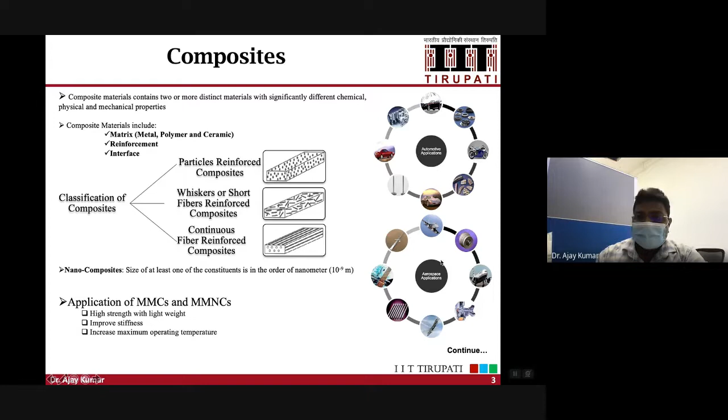So I will focus more on particle reinforced composites. Why do we choose these composite materials? Because they have high strength with lightweight, improved stiffness, and they can also be used in high temperature conditions. You can see there are various applications of these composite materials, and we will be discussing these applications after this technical presentation.

Let me take you towards the market of these composite materials. Why there is so much interest in these materials? Because metal matrix composites have a good market in most countries. If you take the example of India, it has a very rich history of developing composite materials. It started a long time back in the 1970s, 1980s.

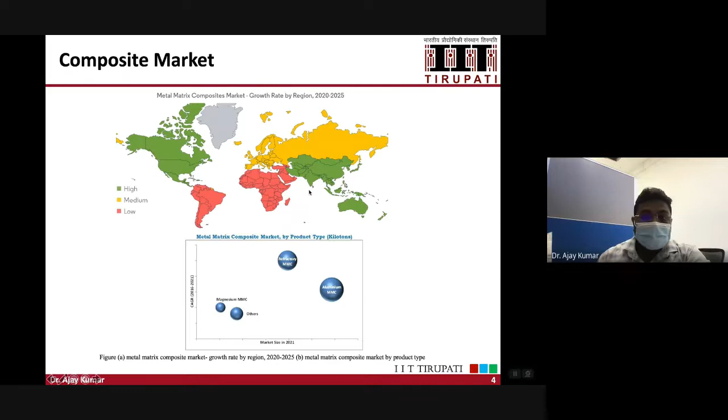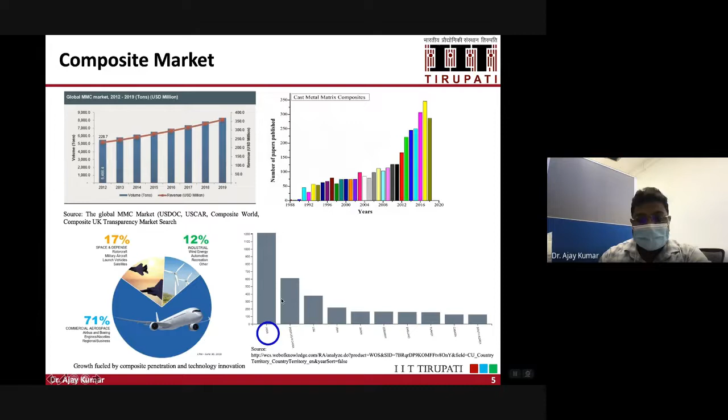Today also a lot of work is going on in this area, and now new types of next generation composite materials are being developed. If you see the number of publications in this area, you will be surprised to see that India is publishing more papers compared to other countries.

Now you will be aware about different processing methods for making these composite materials - vapor deposition, liquid state processing, solid state processing. Each process has its own pros and cons. So in today's talk, I will be focusing on a new method, friction stir processing, to make nanocomposite materials.

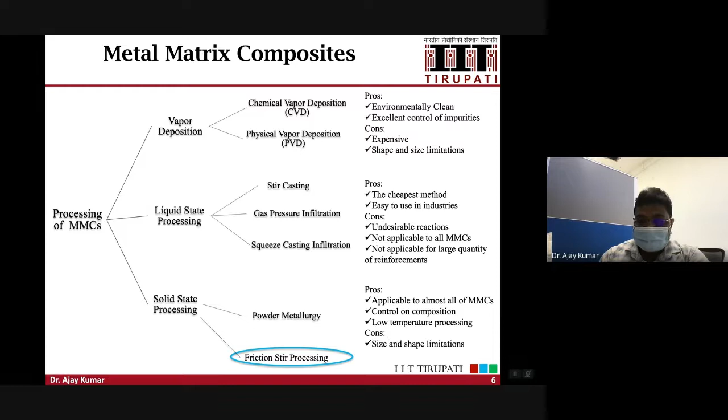When you talk about composite materials, you should also know about the strengthening mechanisms which operate in metal matrix nanocomposites. There are four types of strengthening mechanisms that operate in metal matrix nanocomposites. First is grain refinement strengthening.

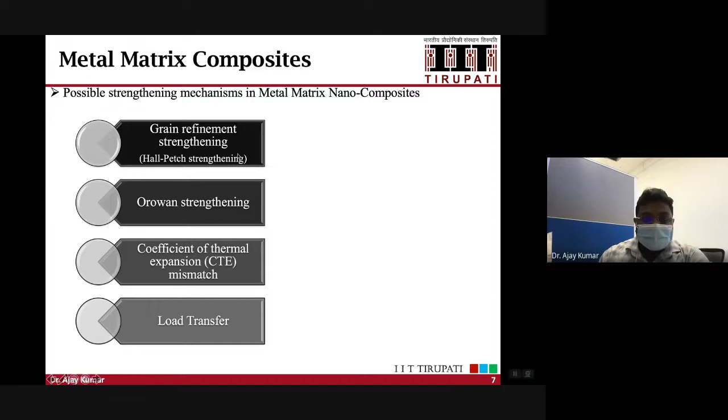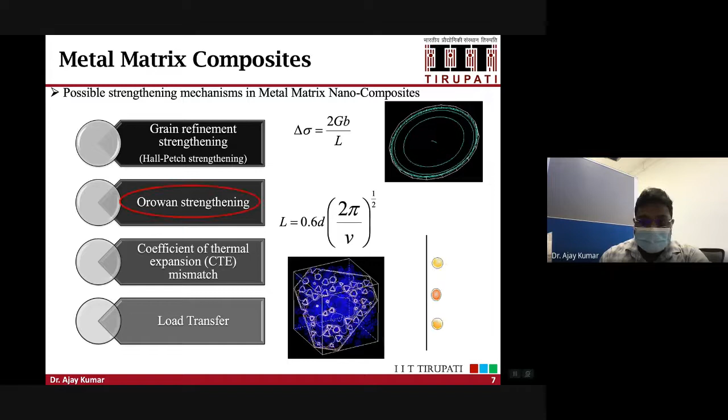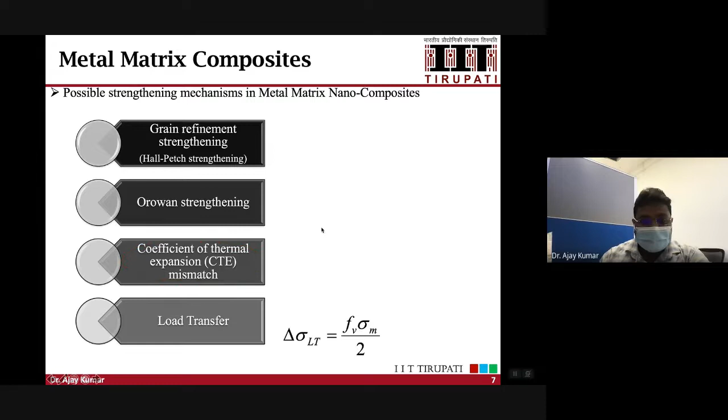There we talk about Hall-Petch strengthening, then Orowan strengthening, where you have dislocation loops and dislocation interactions. Then another mechanism is the coefficient of thermal expansion mismatch between the matrix and reinforcement. And then you have load transfer. So these mechanisms are operating in metal matrix nanocomposites.

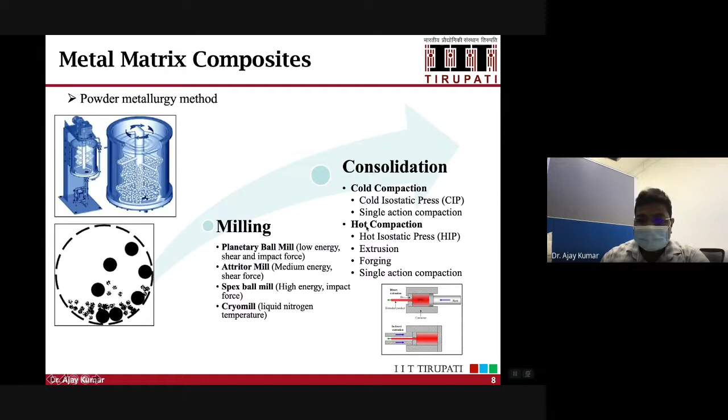When you talk about the powder metallurgy method of making composite materials, you will be aware of the milling process and then consolidation of the milled particles. This comes under the powder metallurgy process, where you have different types of ball milling, and then you reduce the particle size of the material, and then you do compaction - either cold compaction or hot compaction, depending on the requirement.

Now, when we talk about composite materials, we are aware that metal matrix nanocomposites have high strength to weight ratio, high thermal stability, low coefficient of thermal expansion, and high wear resistance. Because of these features, we are interested to develop these materials.

We are also aware that the size, shape, content, and distribution of the dispersoid, matrix interface bonding, and the microstructure properties are the controlling parameters for the performance of these materials. So when you see the stress strain plot for these materials, you will always see those materials have high strength.

So take the example of this stress strain curve, where you have aluminum 4.1% AlN, and then aluminum 16.4% AlN. What you see from this stress strain diagram is high strength compared to the base material, but the toughness of this composite material is not great. It is reducing compared to the aluminum, or it has less deformation compared to the base material. That's why these composite materials have limited use in automotive or aerospace industries.

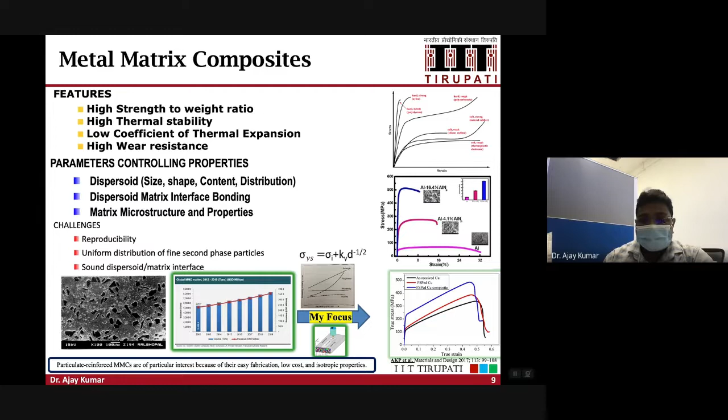That is why we are using an innovative idea of utilizing the friction stir processing method to make new composite materials. As you know, we have mechanical alloying and solidification processing as conventional methods for making composite materials. At the same time, we have limitations.

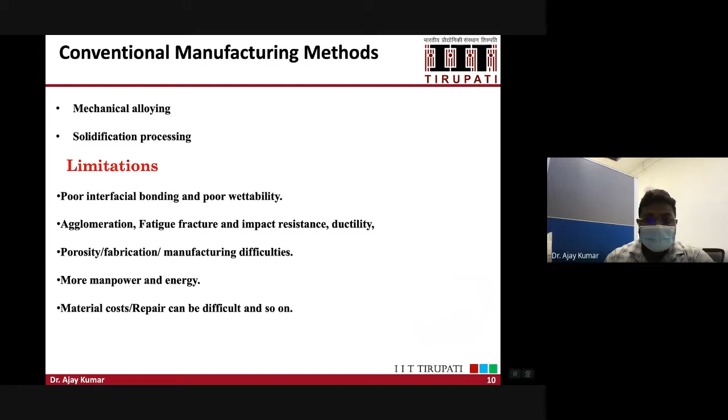We have poor interfacial bonding and poor wettability between the matrix and reinforcements. We have problems of agglomeration, fatigue fracture, impact resistance, porosity, and we use more manpower and energy to produce these composite materials using conventional methods. At the same time, we also face the problem of cost and repair.

So when you make composite materials using conventional methods, for example metal casting - casting is a very well-known method for making composite materials - there are scientific issues when you use casting for making MMCs. First is the transfer of reinforcement into the melt, then movement of reinforcement into the melt, effect of reinforcement on viscosity and fluidity of melts, effect of reinforcement on nucleation growth and microsegregation, and engulfment or pushing of the reinforcement particles by the solidifying interface, and then effect of distribution, bonding, volume fraction on physical and mechanical properties of MMC. These are the scientific issues.

These issues are still there, and a lot of research needs to be done. It has a lot of scope of research to address these scientific issues.

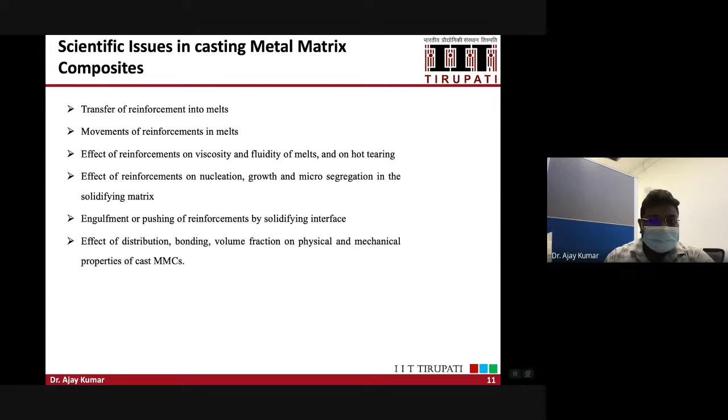Now let me introduce the friction stir processing method. You will be aware about this method very well. This method is based on friction stir welding.

This is the schematic of friction stir processing, where you have the friction stir processing tool which rotates at high RPM, and then you plunge it into the material. Then it will also traverse in a particular direction. So if it is welding, then you have the two metal plates, and along the welding direction, this tool will traverse. So you have the tool rotation, the downward force, as well as this tool moving along the processing or welding direction.

When you have this processed material, you get four types of zones. The middle one is the stir zone, which is also called the composite zone if you are using this process for making composite materials. Then you have the thermomechanical affected zone, heat affected zone, and then the base material.

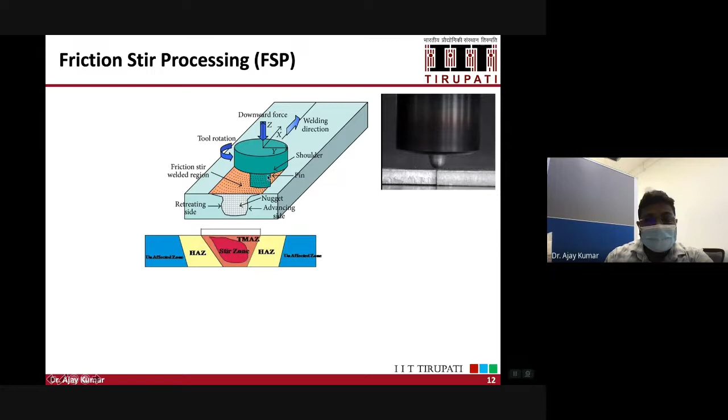So when this tool interacts with the hard ceramic particles during the process, you will have a lot of wear or material removal from the tool. It means that the tool is getting mixed into the metal matrix, and you will get undesirable properties. So you need to avoid this tool wear, and this is a great challenge. How will you avoid this?

This work was reported in 2004, where they conducted a study on aluminum-based composite materials at different RPMs and reported the tool wear.

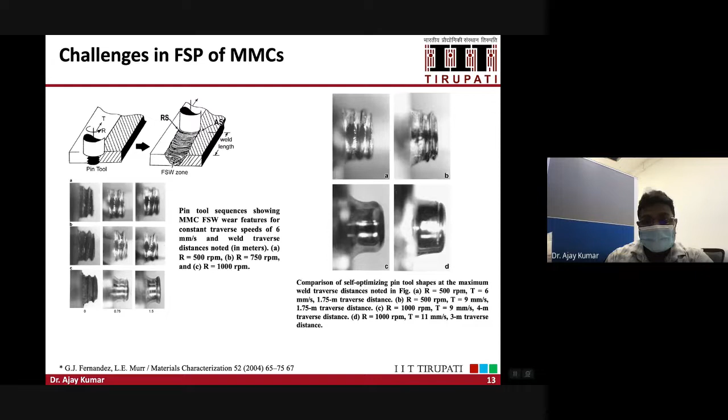To avoid this, we came up with an idea: we want to make the MMCs using this process, but we need to avoid the tool wear. The idea is to get fine nanoscale particle distribution, remove all possible defects of conventional MMCs, avoid the FSP tool wear, homogenize the microstructure, and at the same time improve the mechanical properties, high strength and high ductility.

So we innovated an approach where we mixed a cross-linked polymer into the metal matrix. If it is polymer, then during the process the temperature will rise, and this temperature is sufficient to convert the cross-linked polymer into the ceramic phase.

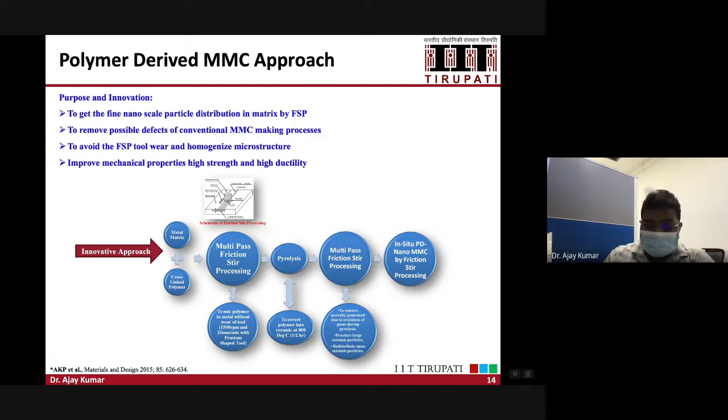If it becomes porous, it means we cannot use that material. So you have to remove the porosity, then do the multi-pass FSP process to remove the porosities and redistribute the particles at the nanoscale. This is the approach, and this idea we published and patented in 2015.

Let me tell you about PDC materials. They are a very special type of ceramic material formed by the pyrolysis of pre-ceramic polymers. There are two categories of these polymer derived ceramics: silicon carbonitride or silicon oxycarbide based PDCs. When they convert into the ceramic phase, you get silicon carbide and silicon nitride.

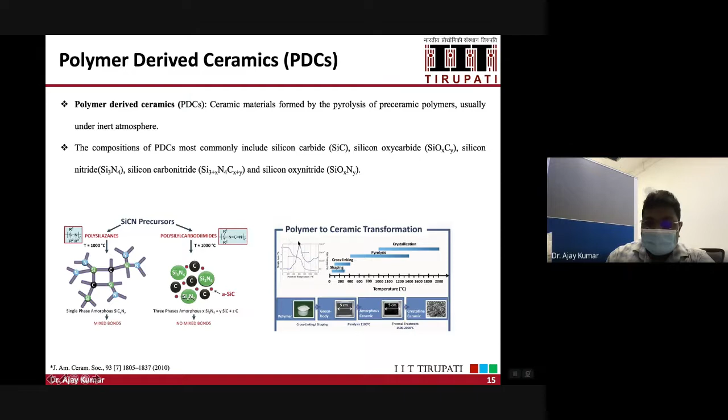A lot of work has been done on this material, it is well established. You have the polysilazanes and polysilylcarbodiimides - two categories - and you can convert these polymers into ceramic using the pyrolysis process.

There is work reported on using these PDCs in casting as well as powder form. When people tried to use PDC materials in the casting process, they found agglomeration of the particles due to van der Waals forces and porosities. And when they used the powder metallurgy process, they did not get the nano size distribution.

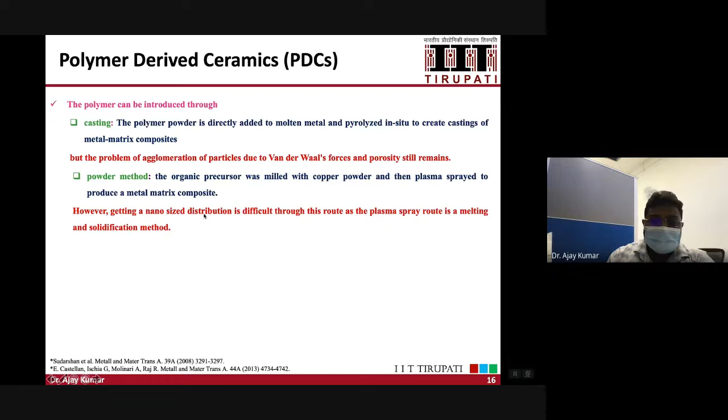That is why we used the friction stir processing method. The idea was to disperse the cross-linked polymer into the metal. This is the drawing of the sample: a 6 mm copper plate, using copper as the matrix material.

PDC is the other reinforcement. We made the groove and the holes to insert the polymer particles according to the volume percent of the PDC materials. This is the 5-axis friction stir welding machine we used for making these composite materials, and this is the design for the FSP tool.

We used a 6 mm thickness plate, and here you can see the design of the tool.

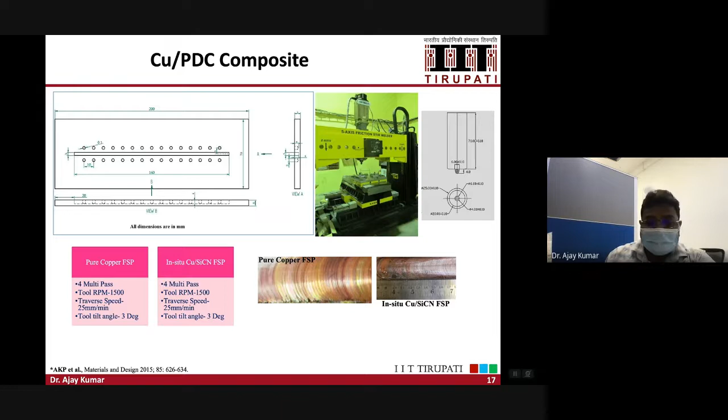We did the FSP on the matrix material copper as well as on the composite, and optimized the process parameters. We did 4 multi-pass processes at 1500 RPM and 25 mm per minute tool speed, with a tool tilt angle of 3 degrees. This tool tilt angle is very important in friction stir welding - as you must know from the previous talk, it provides a backing or forging force for support. Without it, you get a lot of cracks during the process.

Now let me take you to the microstructure. In the annealed copper microstructure, the grain size is around 400 micron. The silicon carbonitride, the polymer cross-linked powder, was around 5 micron.

In the first step, we mixed this cross-linked polymer into the copper matrix and did 4 multi-passes. From the first pass to the fourth pass, the size of the polymer particles decreases and goes down to the nanoscale.

When you take the microstructure of these composite materials, these are scanning electron microscope pictures, micrographs. You need to be very careful while taking these pictures because they are all polymer particles. You need to control the voltage or power of the system, otherwise these polymer particles can burn and you may not be able to see those particles inside the matrix. So we fixed our voltage around 5 to 10 kilovolts while taking these pictures from SEM.

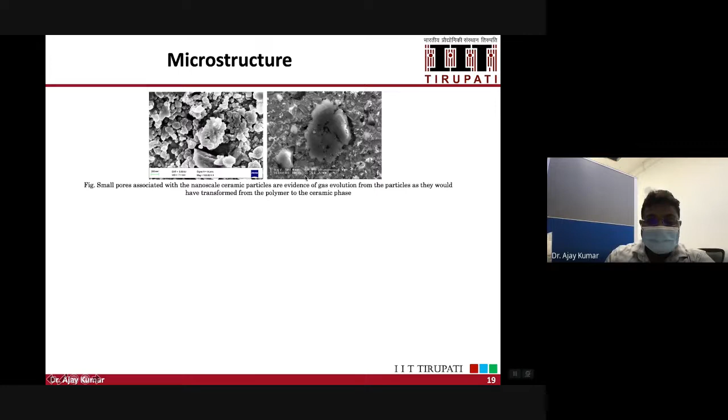As I mentioned in the previous slide, during the process the temperature will rise, and the temperature will help in the pyrolysis of the cross-linked polymer. So during the pyrolysis you will see a lot of voids, and that we can also observe from the microstructures, that a lot of voids and cracks are there in the particles.

Then we did the multi-pass processing on the same porous materials and redistributed the ceramic particles, and we again did the multi-pass process, and you can see there are no voids, but you can see the distribution of these PDC particles inside the matrix.

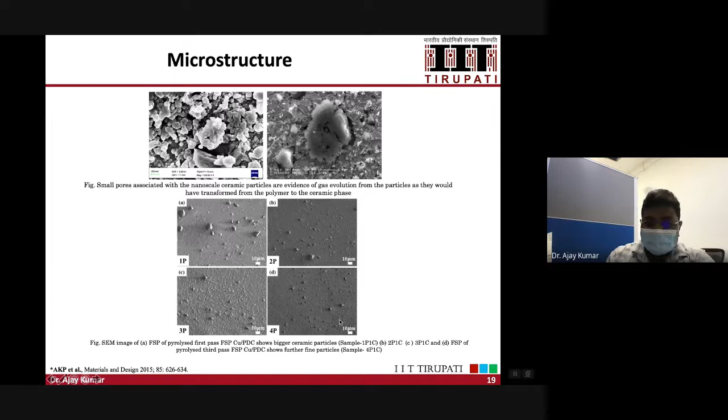To further study and understand the distribution of the PDC particles, we did the EPMA mapping and understand the distribution of the PDC particles. All the elements are present.

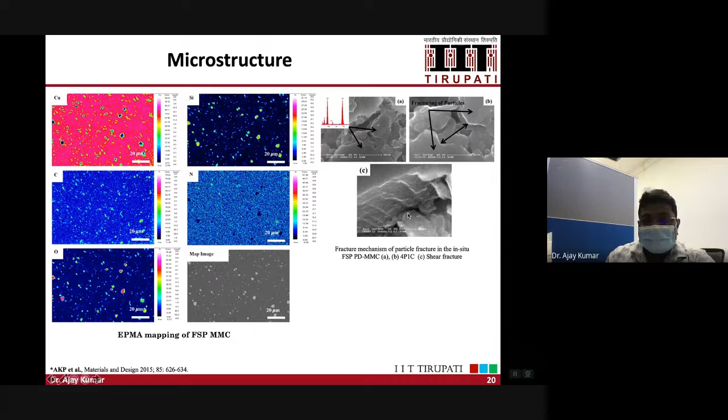Then we also understood about the fracture of these PDC particles. So we are talking about now distribution or dispersion of these PDC particles in the metal matrix. We also should know how these PDC particles are getting distributed into the matrix during the process. As you know, during the FSP process the tool rotates at high RPM, and due to the lot of shear forces generated during the process, those particles will be fractured. So you can see the shear fracture on these particle surfaces and detachment. And these particles will keep on fracturing until they reach a critical size.

We have also confirmed the transformation of the polymer phase to the ceramic phase. And the ceramic phases we have got are Si3N4 and SiC from the X-ray analysis.

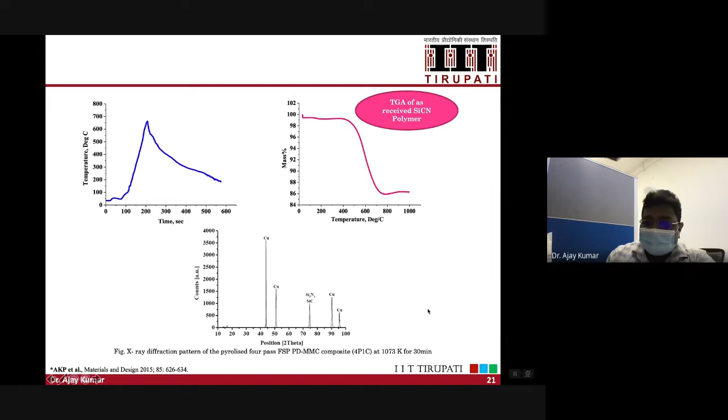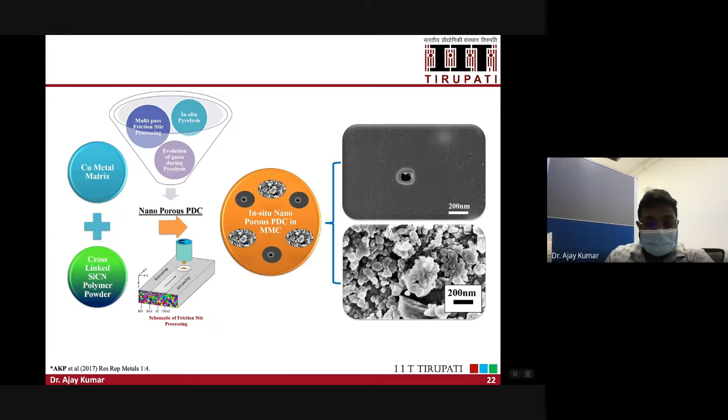As I mentioned, during the pyrolysis you get a lot of defects or voids in the matrix material or ceramic materials. So that composite material is also useful - that material will become a metal foam, and you can use it in various applications where you need to absorb a lot of energy or shock absorption. That material will help in those applications. So we can also develop the metal foam using the same approach, and you can also get the metal matrix nanocomposites. So with one approach, you are getting two types of materials for different applications, right?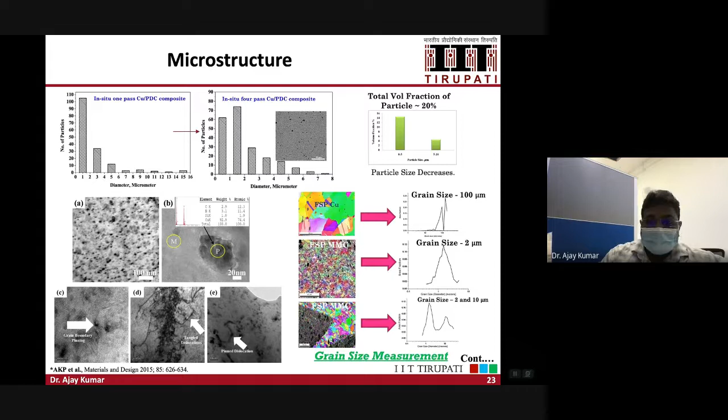And then we also should know about the strengthening mechanisms which we discussed in the previous slide. We found that the dislocations entanglement, and the dislocations are pinned by these particles, and they will contribute to the strengthening mechanism of these composite materials.

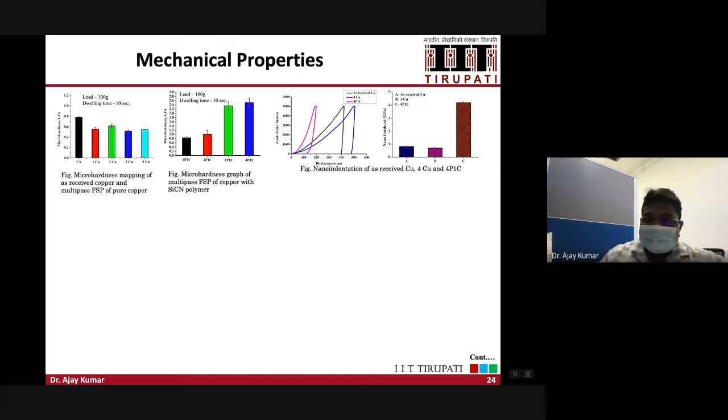Now let us discuss about the mechanical properties. So we conducted mechanical testing on these materials - a simple hardness test we did, and we have seen a significant amount of increment in the micro hardness, as well as at the nanoscale we have done the nano indentation, and we have seen the increment of the hardness. Now, an interesting point which I would like to explain here.

As I mentioned in the first slide, these composite materials have limited applications in various places like automotives or aerospace, because they have high strength but face the problem of less toughness. But here we have demonstrated, we have proved that these composite materials are high strength as well as high toughness.

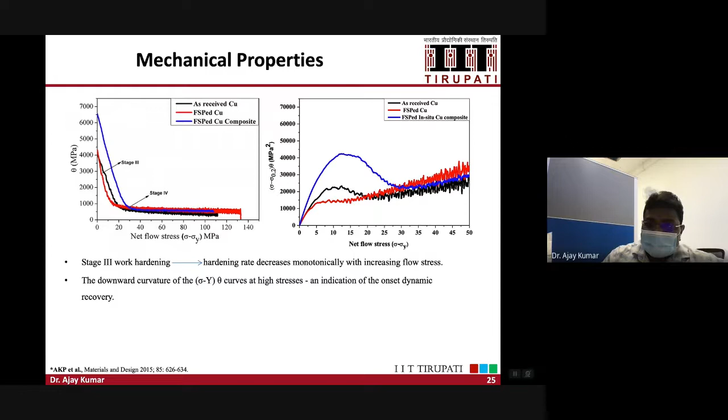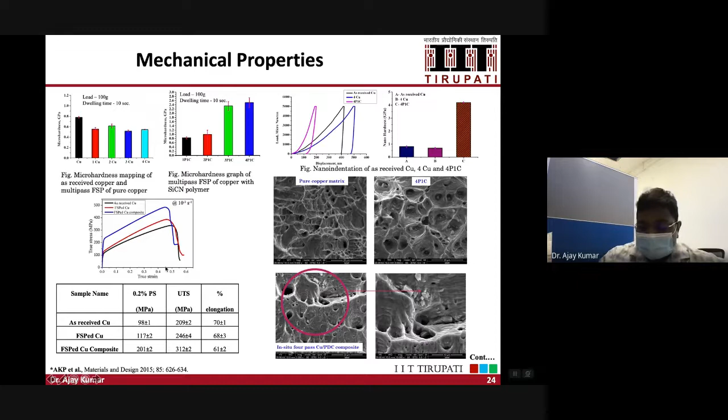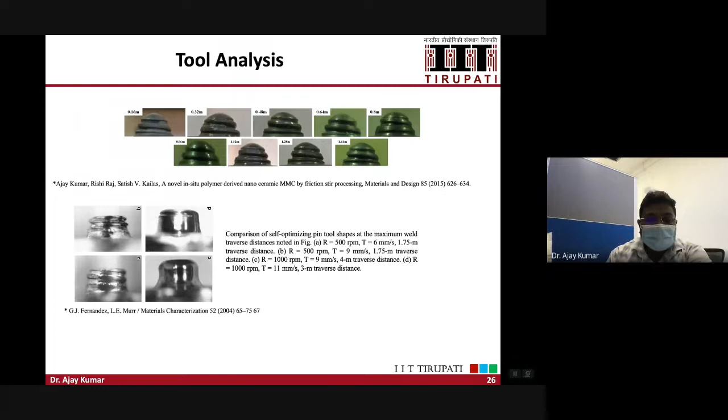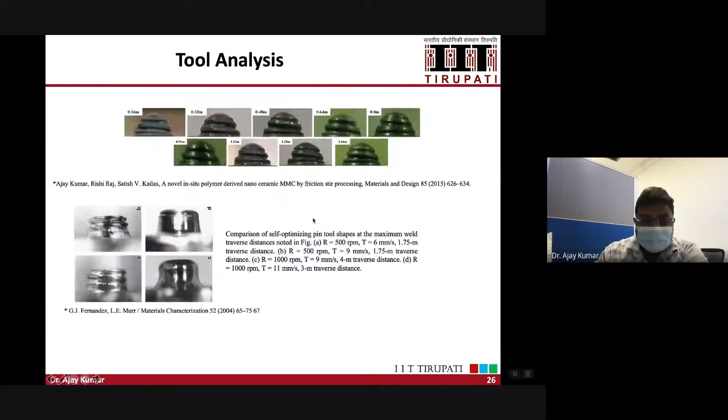Now, as I mentioned in the previous slide, when you use the FSP method for making metal matrix composites, you have tool wear. That is the main challenge in this process. But we demonstrated zero tool wear or minimum tool wear in our work. In our multi-pass process, the tool traveled almost 1.4 meters, and we have not seen any tool wear geometrically in the process. So this is the case study for the copper composites.

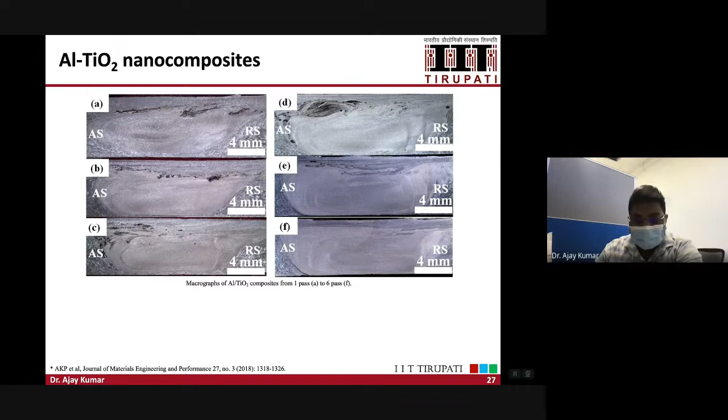Then we did a similar type of study in aluminum titania composites. Here also we have demonstrated the distribution of titania particles in the aluminum matrix and how these particles get fractured during the process. So you have the bigger particle which is porous, and by the multi-pass process these particles will be fractured and go to the nanoscale range.

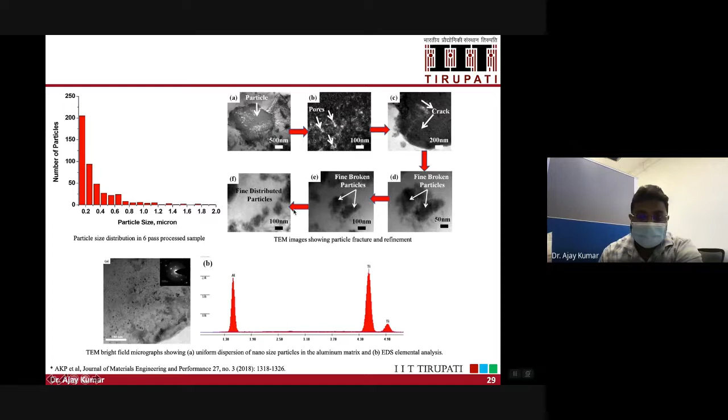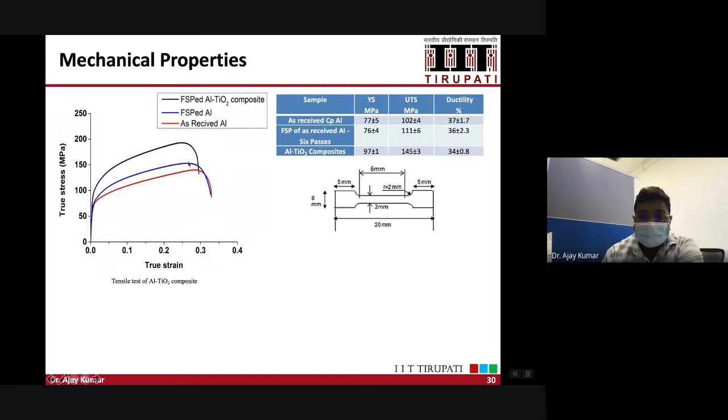So this type of mechanism we have developed to make these nanocomposite materials, and we got similar results in these composite materials, with high strength, high yield, as well as high toughness. We have also verified the experimental results with the theoretical model, and we have seen that the yield strength predicted by the Orowan equation and the experimental yield strength are almost the same.

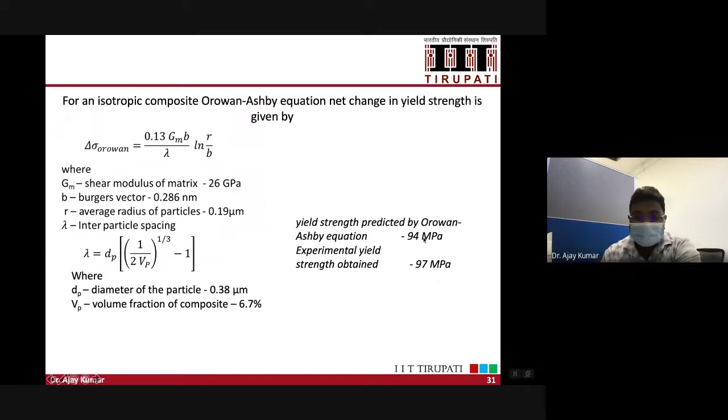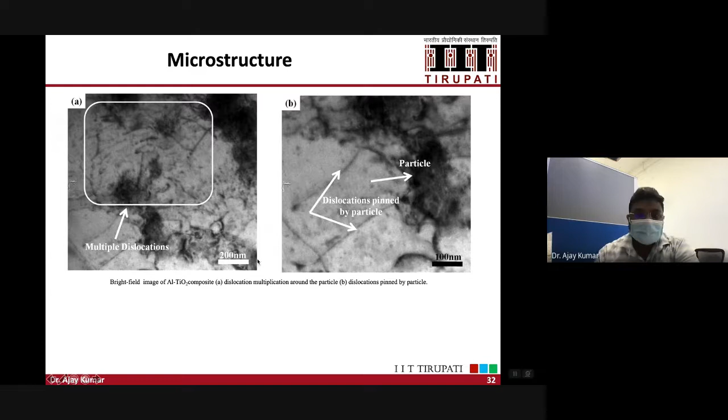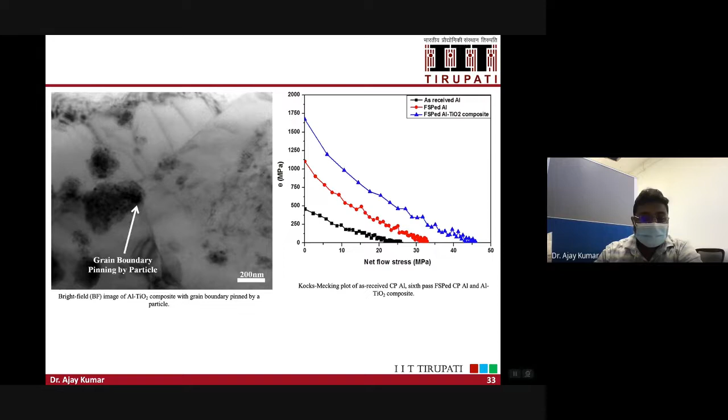Then this is an example of dislocation multiplication and dislocations pinned by the titania particles in the aluminum matrix. You can see these are the grain boundaries, and these grain boundaries are pinned by the titania particles. These are the high magnification images where you will clearly see the strengthening mechanisms operating, which we discussed in the previous slide.

The third example I would like to show you is the aluminum graphene composites. You know graphene is a very famous material with high strength and a lot of other applications. So we studied aluminum GNP, graphene nanoplatelets, composites.

Here we applied the hybrid approach of making these composite materials. We coated this GNP on the aluminum A356 alloy using the squeeze casting method, and then did the FSP to distribute this GNP in the composites.

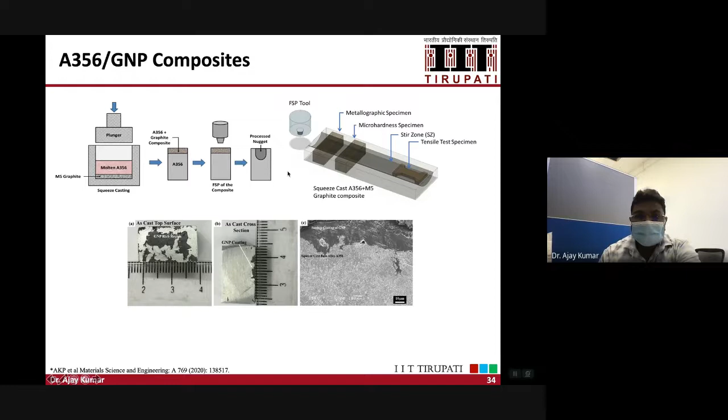Let me show you the microstructure. When we applied this process, the first step was squeeze casting, where we produced the coating of GNP on the A356 alloy, like a surface composite. Then we carried out the FSP process on the sample, and this is the nugget zone after the process, which is the composite zone here.

Then you do the microscopic study to find out whether these nanoplatelets are embedded inside the matrix. As you know, A356 is a silicon based alloy. So this is the GNP, the graphene nanoplatelets, embedded inside the matrix, and you will also see the fine silicon particles.

When we conducted the transmission electron microscopic study to understand at the nanoscale, we saw the aluminum matrix and the GNP flakes, with no defect at the interface, and the silicon particles were reduced. We also saw a significant increment in the strength as well as the toughness of these materials.

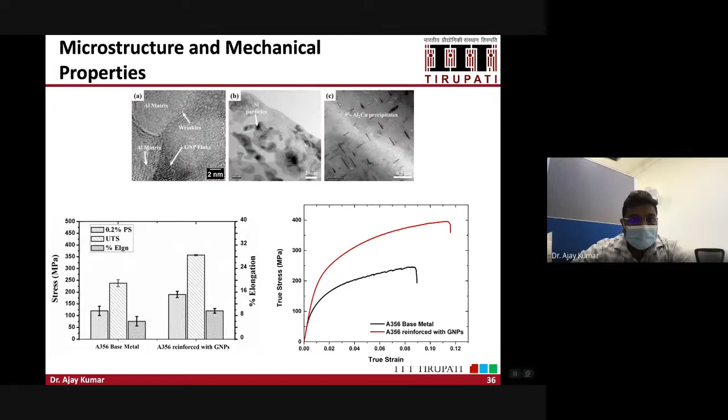So here also you can see similar results to those I showed you in the copper composites and aluminum titania composites. I have now given you three studies where we demonstrated similar results. As I mentioned in the first slide, composites face the problem of less toughness, but they can have high strength when you use conventional methods.

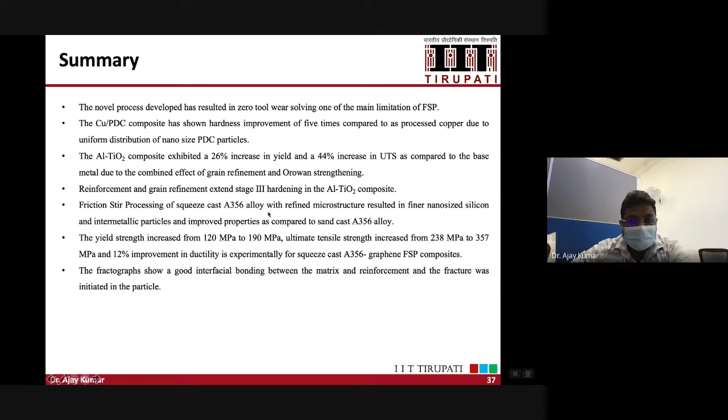But when you have the hybrid approach or advanced method of making composite materials, then you can address those issues. So to summarize this work, we have developed a process where the tool wear is zero, which is the main limitation in the FSP process. We have developed copper composites, aluminum titanium composites, and A356 GNP composites with high yield as well as high toughness.

Now let me take you towards the application part of these composite materials. From this slide you will understand the locations where composite materials are used. This is the example of discontinuous MMCs, such as the aluminum graphite antenna waveguide used on the Hubble telescope.

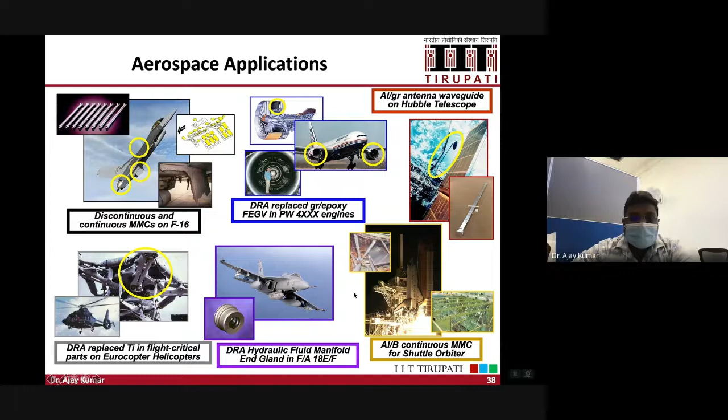There are various applications where they use lightweight, high strength composite materials in automotives. You have the MMC crankshaft pulley, this is the cylinder bore, and this is the MMC disc brake rotor.

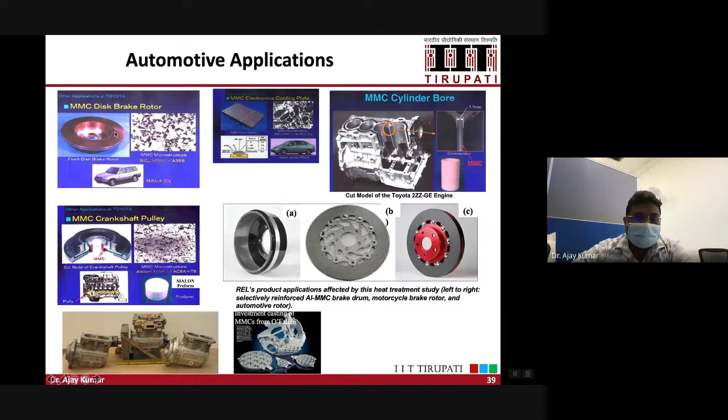Now let me give you very important information which most of you will be interested in. There are selected companies or industries that produce these composite materials. Most are US based companies. In India also we have a few companies developing these composite materials, but most of the work is still in the research stage. So there is a huge scope where you can think of developing these composite materials. You can have your own startup for different applications.

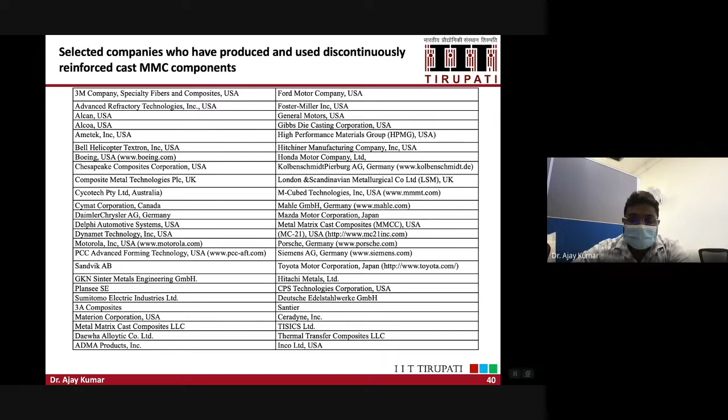Now this slide provides information about aluminum MMC components for different applications. Take the example of aluminum graphite composites, which can be produced by the gravity casting method and are used in cylinder liners. Companies like Ferrari and Hiromotors use these composite materials.

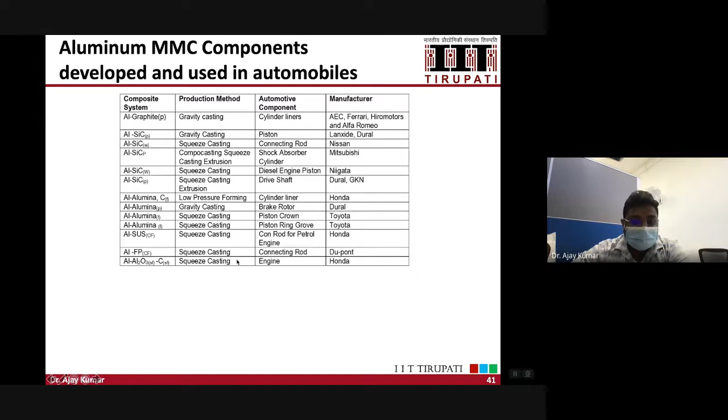Now let me show you the Make in India technologies. In India, as I mentioned, a lot of development and research work is going on. This is an example of Make in India technology: pressure die cast aluminum silicon carbide composite brake drum application, work produced at CSIR lab, Bhopal, Madhya Pradesh.

This is the example of functionally graded aluminum matrix composite materials, such as cylinder liners, gears, brake rotors, and pistons. These are all aluminum silicon carbide composites made by the stir casting method, a very good, advanced process for making composite materials. This work is from CSIR Trivandrum.

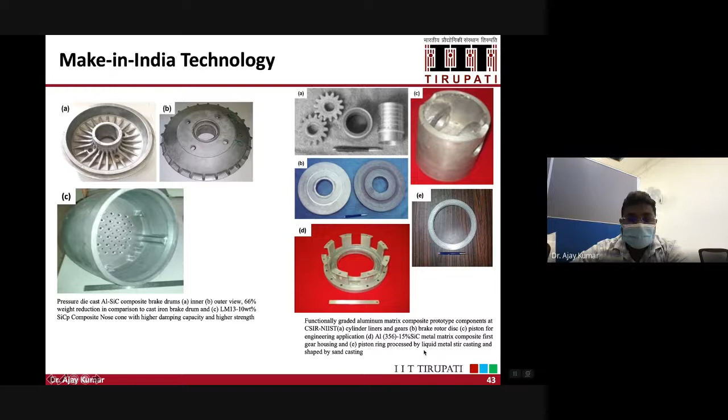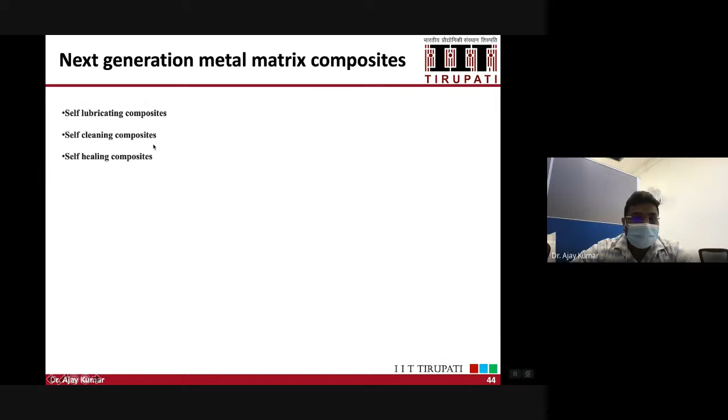Now let me give you some ideas about next generation metal matrix composites. In the next generation composite materials, you will see self-lubricating composites, self-cleaning composites, and self-healing composites. For self-cleaning and self-healing composites, there are healing mechanisms operated within the materials.

So when you have any crack inside the material, and if you are able to detect that crack during operation, you should be able to heal that crack so that the life cycle of that material increases. That is the idea, and a lot of work is now being done on this.

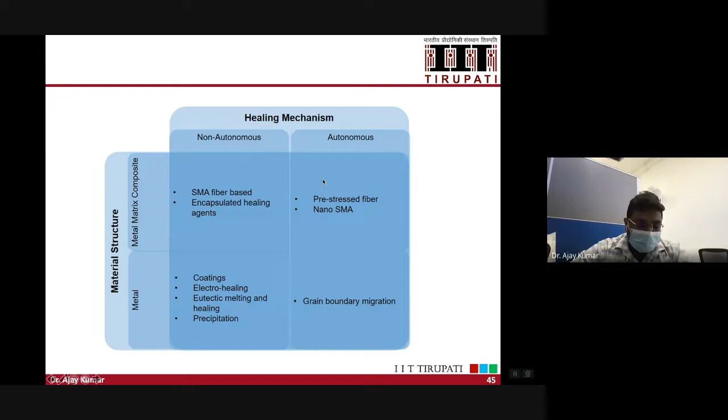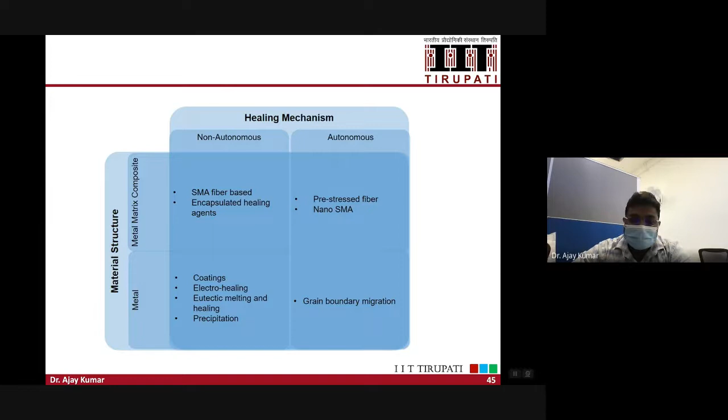At IIT Tirupati also, we are developing self-healing composite materials using different types of reinforcements. You can also use shape memory materials and encapsulated healing agents for developing self-healing materials. If you are interested, we can discuss in detail; you can contact me, as these are very important materials.

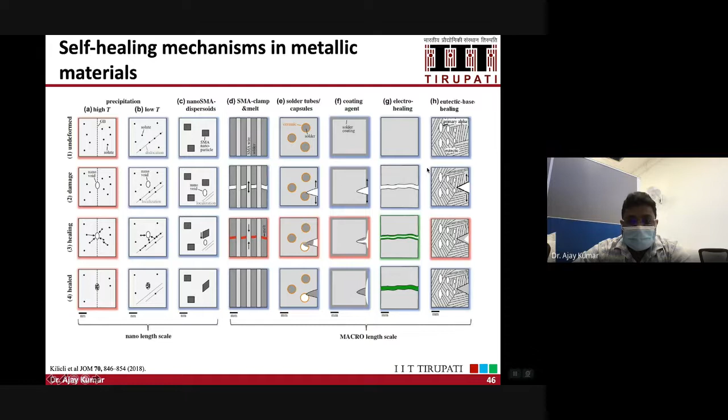There are different types of self-healing mechanisms operated in these materials. One is precipitation, which you can use for healing the crack. You can also use nano shape memory alloy dispersoids, solder tube capsules, and eutectic based healing to develop these materials. This is the future of materials in this area, and it is still in the research stage.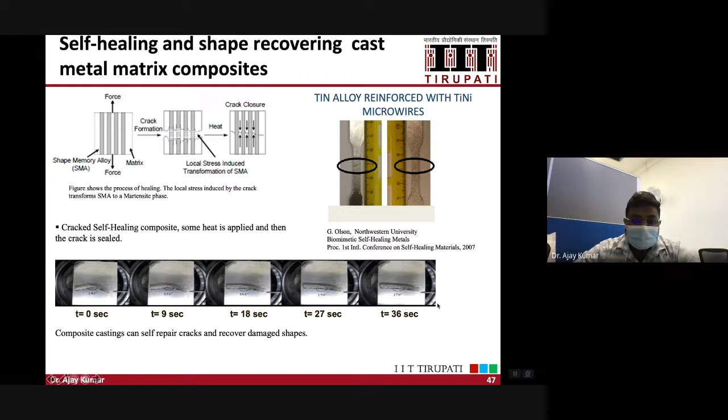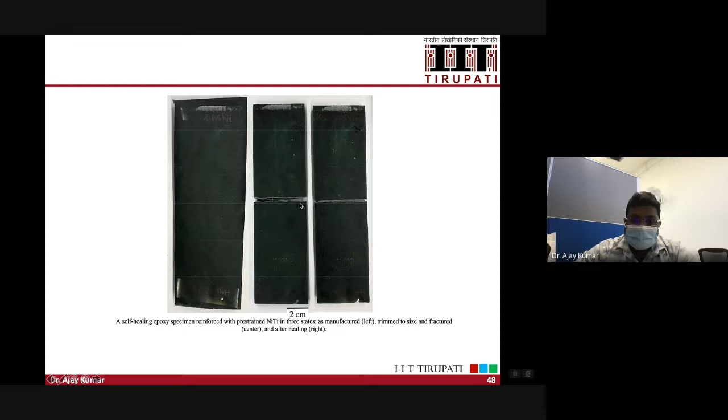You can also see this example of a self-healing epoxy specimen, where you have the crack and then you can fill this crack partially. So you have to understand the self-healing mechanisms and damage detection in the material during the operating conditions. This is the future of metal matrix composite materials.

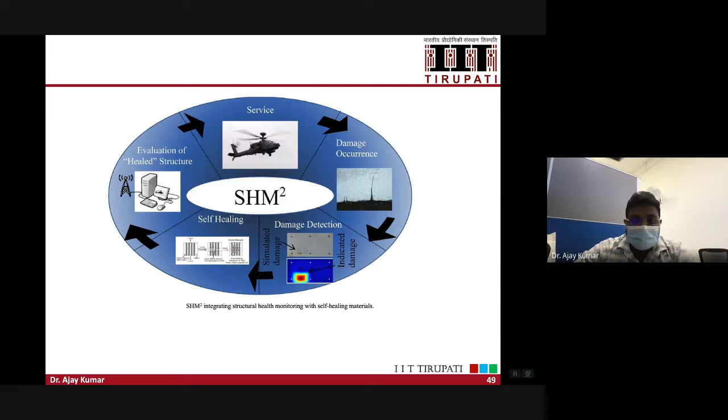Now, at IIT Tirupati, we have advanced casting processes. What we offer is we demonstrate different types of casting tools. We have established Foundry 4.0 at IIT Tirupati. We are demonstrating casting simulations, using 3D printing, and hands-on experiments in metal casting. We are also providing education, training, research, internships, metallurgical skill development and outreach activities.

We have advanced casting processes: stir casting, vacuum die casting, squeeze casting, pressure infiltration, twin rolling system, and advanced casting process systems for making different composite materials for different applications, including self-healing composite materials.

Now, with this, I will end the research imperatives in this area. As I mentioned in the previous slide, the scientific issues which are still there and need to be addressed: preventing agglomeration and clustering of micro and nano-sized reinforcements during synthesis, reducing cost of the MMCs, recycling, and developing a property database. This is not available at all.

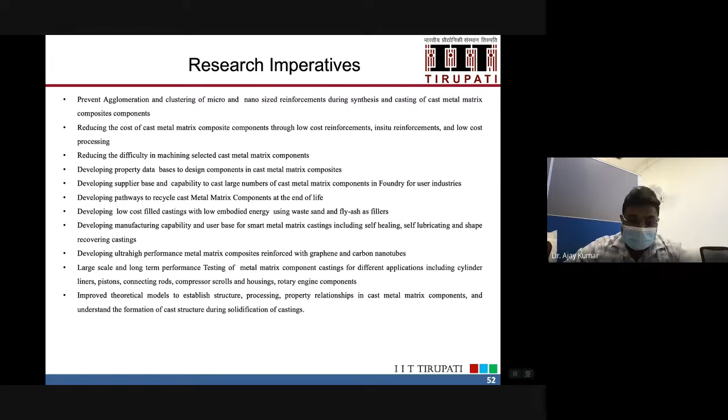Low cost, ultra-high performance MMCs, large scale and long-term performance testing are needed. We also need improved theoretical models to establish structure-processing-property relationships. Conventional models may not be applicable to these next generation composite materials, so there is a need to develop improved theoretical models to understand these relationships.

So with this, I thank you, and thanks for sparing time with us in today's talk.

Now I would like to take some questions. Dr. Namrata, are you there? Participants, if you have any question, you may ask, sir. Any question, Dr. Namrata? No, sir, not from my side. Participants, if you have any question, you can ask. Vishwas sir, it seems they have no question. There is no question from anyone? Is anyone working in these areas, Dr. Namrata, in your group or anybody's group among the participants?